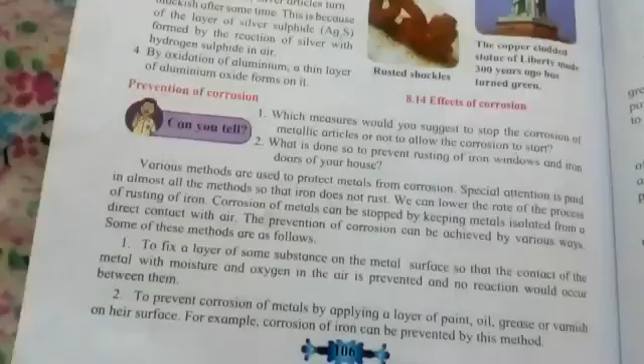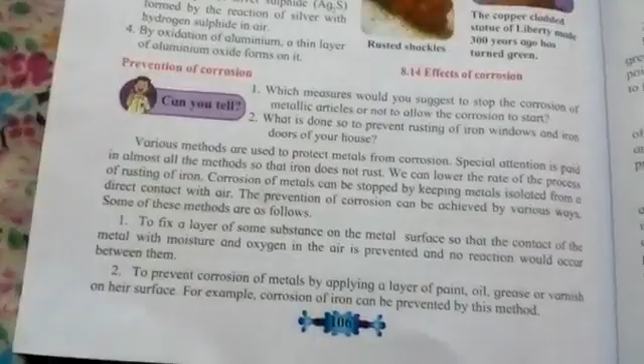Prevention of corrosion means to prevent the metal from getting degraded, or to stop the formation of oxide layer or carbonate layer on the metal. So we'll see all these things.

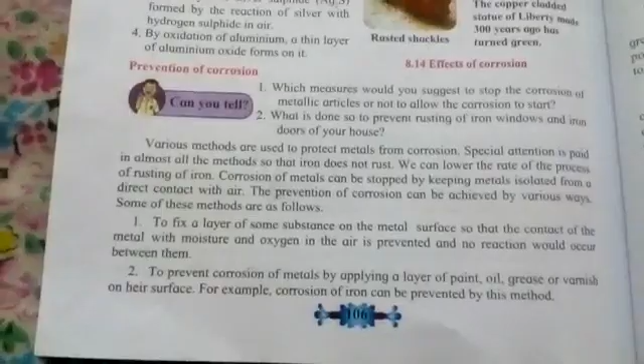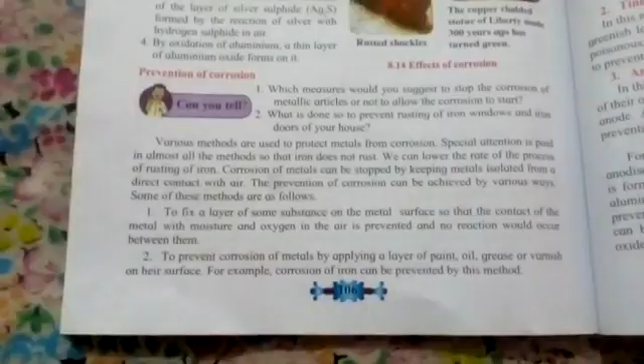First we'll see about iron, that iron can be protected against corrosion because iron gets rusted, and rusting is a part of corrosion, because it is like the chemical attack on the surface of iron which results in the formation of rust. If we are taking proper precautions, we can protect iron from getting rusted.

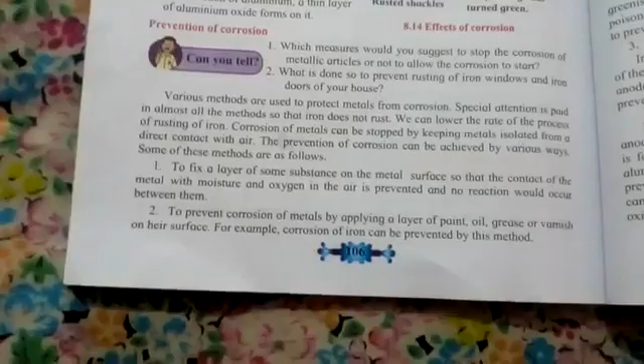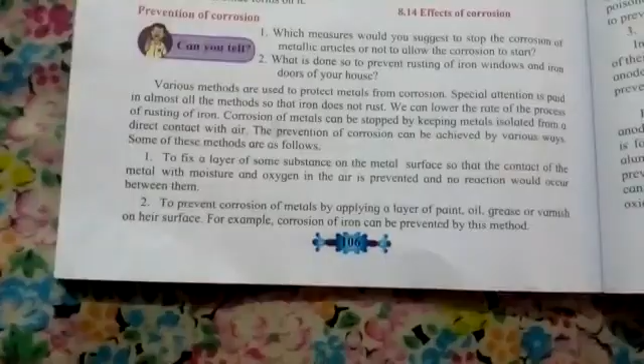Metals can be isolated from coming into direct contact with air so that corrosion will not take place. Or we can adopt certain other methods to prevent corrosion. The first one is to fix a layer of substance on the metal surface so that contact of the metal with moisture and oxygen in the air is prevented and no reaction would occur.

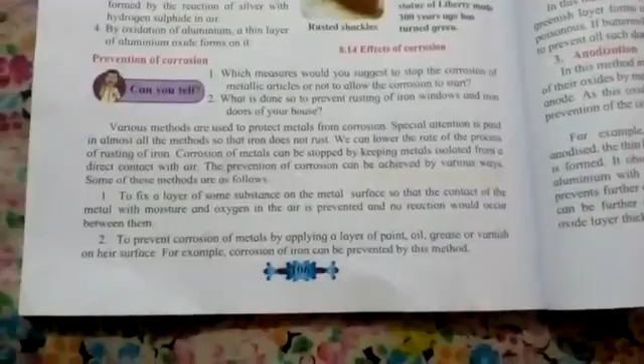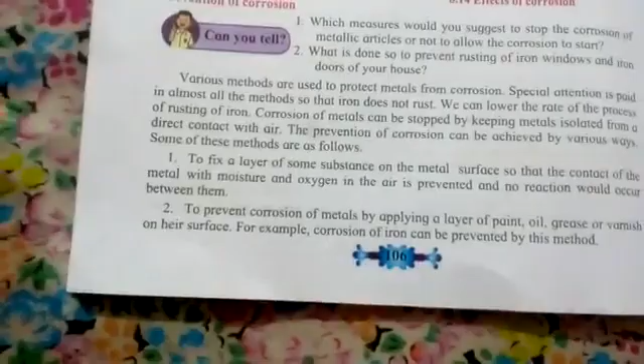If metal is coming in direct contact with environmental agents like air and water, corrosion will take place. If we are taking iron, iron will get rusted. So you have to apply some coating over the surface of iron.

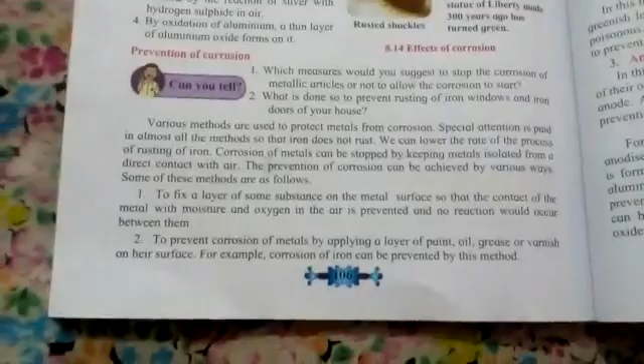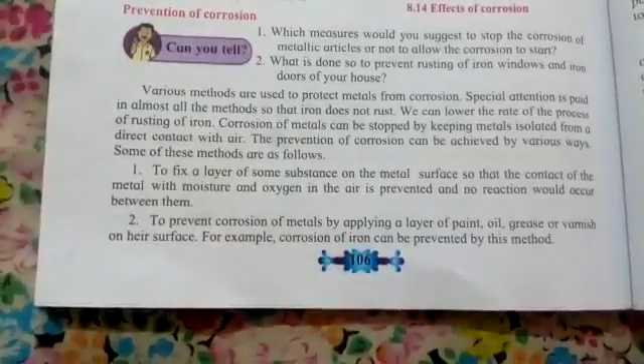For example, if you are painting that surface with oil paint, with grease, or if you are varnishing, you can protect that iron surface from getting corroded. So these are certain methods which, if we adopt, we can protect iron from getting rusted.

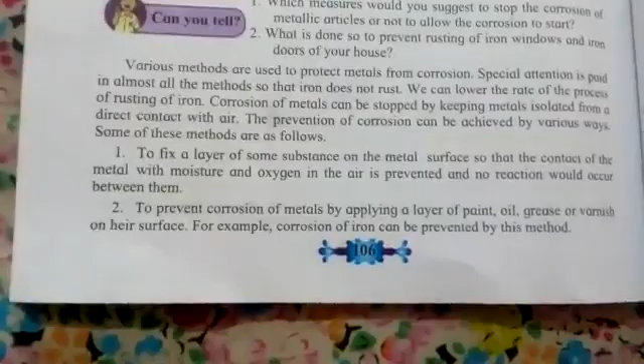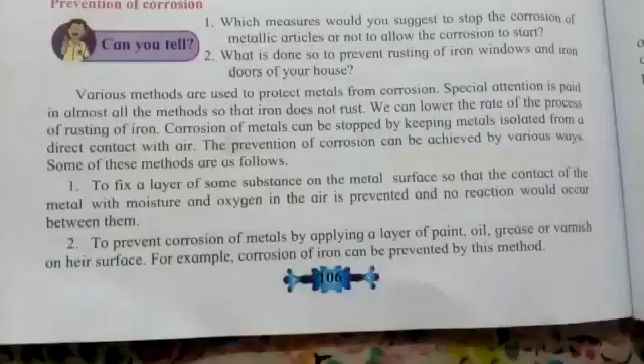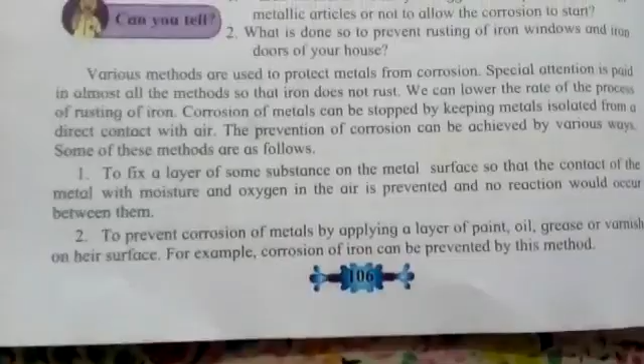These methods are known as barrier methods, because you put some barrier, some obstruction, so that the metal will not come in direct contact with environmental agents like air and water. So what will come into contact is the layer of paint, the layer of oil, the layer of grease, and the metal will be hidden. For example, if you are taking iron, iron will be hidden by this layer of paint, oil, or grease. So these methods can be known as barrier methods, and this is how we can protect iron from getting rusted or corroded.

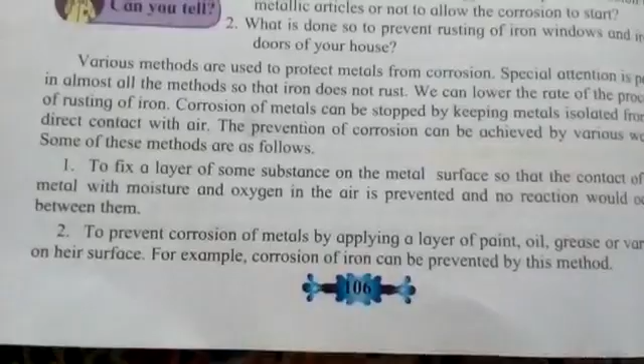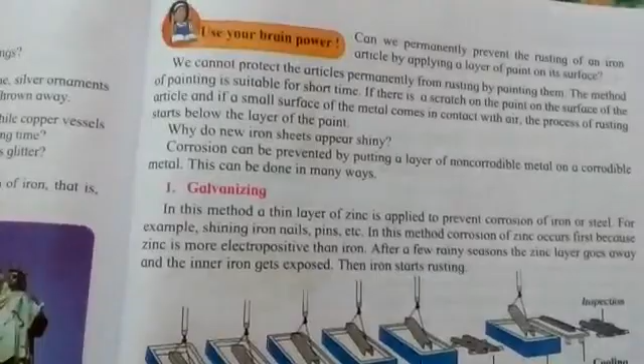We cannot protect the articles permanently from rusting by painting them, because if there is any scratch on the paint, the layer will be removed and the metal surface will get exposed to the air, and then it will get corroded or rusted.

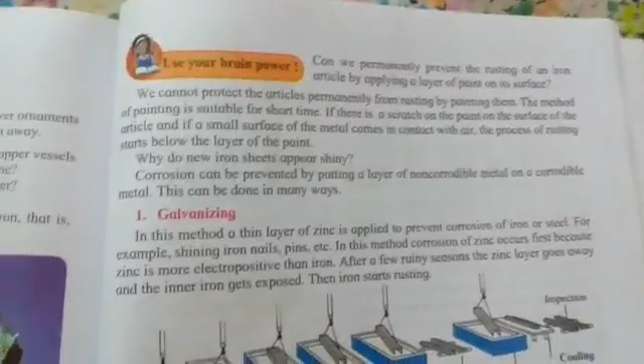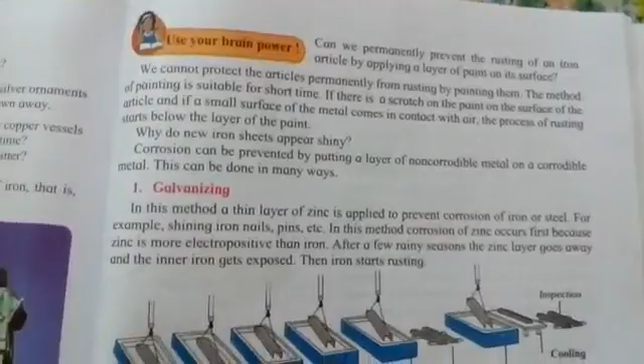So we can adopt certain other methods for protecting iron, and that is given here: corrosion can be prevented by putting a layer of non-corrodible metal on a corrodible metal. This can be done in many ways, meaning we coat certain other metal on the surface of iron, and this is how we can protect iron from getting rusted.

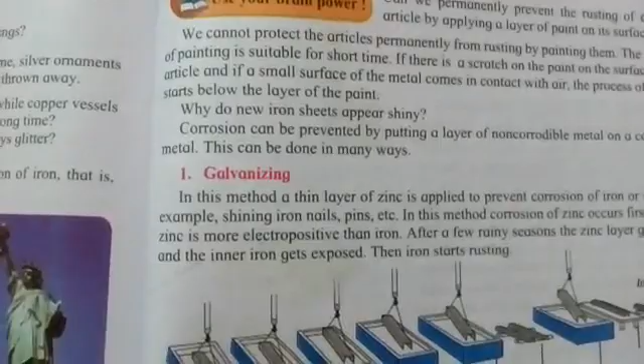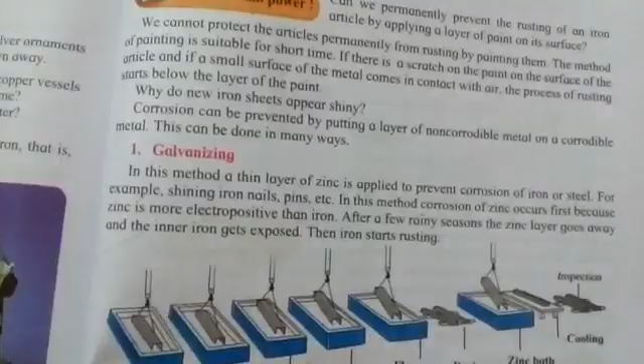The first method is galvanizing or galvanization. In this method, a thin layer of zinc is applied to prevent corrosion of iron or steel. So we can make a coating of zinc on the surface of iron or steel, because zinc is more electropositive than iron, and zinc is more reactive than iron.

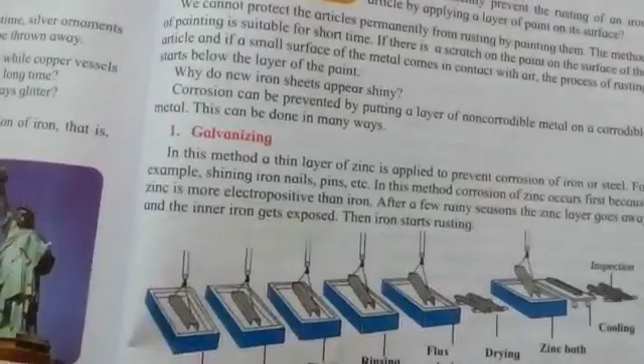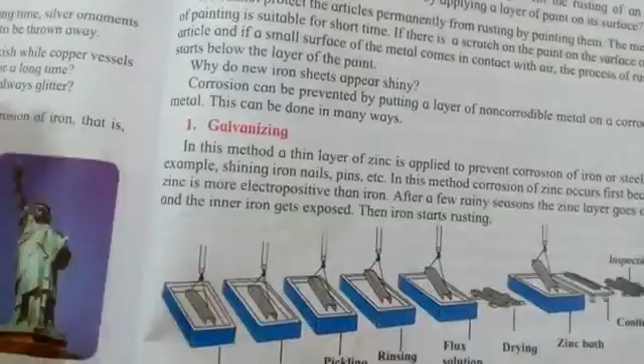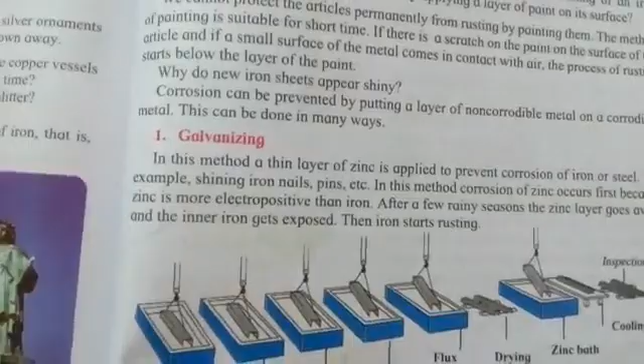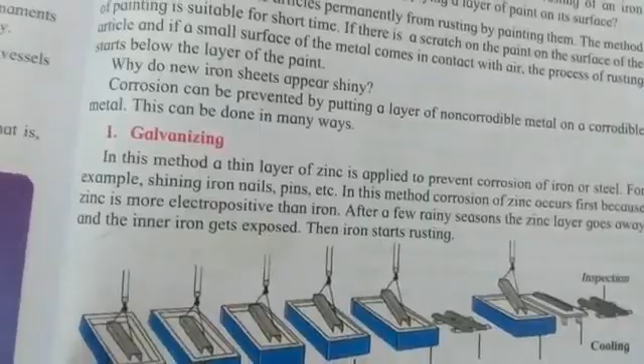So zinc will face the environmental agents like air and water and will form zinc oxide, and iron will be protected because over the surface of iron there is a layer of zinc, and since zinc is more electropositive, it will sacrifice itself. Such a method is known as the sacrificial method, and that zinc layer will not allow air and water to come in direct contact with the iron. This is how iron can be protected from getting rusted or corroded. This is known as galvanization.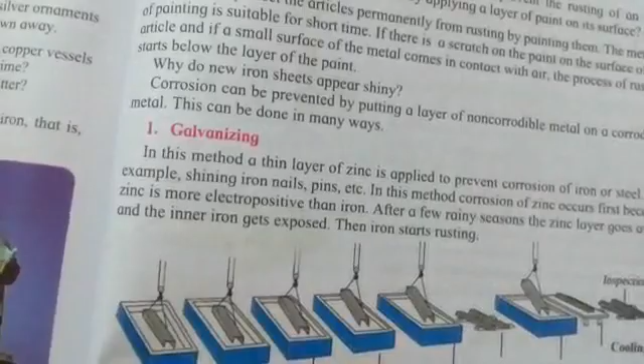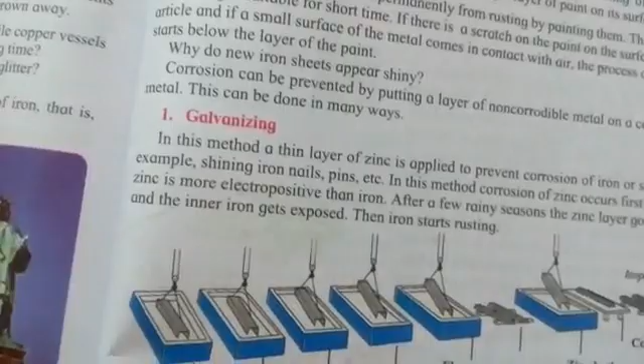Now, there are some steel cans used to store food, but for those we cannot do zinc coating because it may be poisonous. That is why tin coating is done on the steel can from the inner side so that it will be protected against rusting.

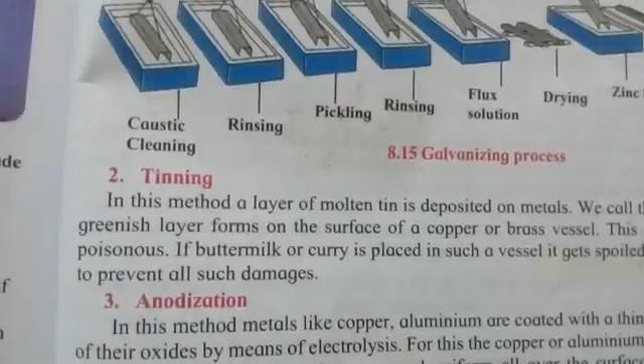Now the next method is tinning itself. In this method, a layer of molten tin is deposited on the metals. We call this kalhai. You might have heard about this term kalhai, where a layer of molten tin is deposited on the vessel so that the vessel will be protected against rusting or corrosion.

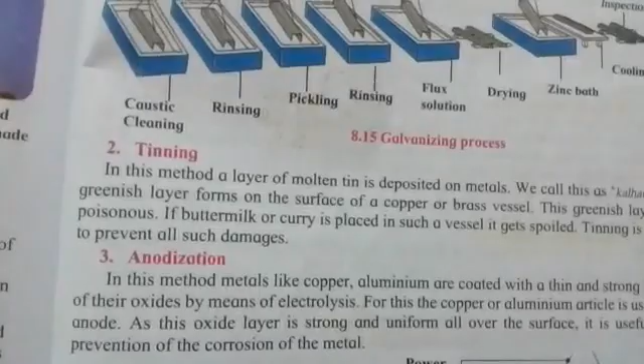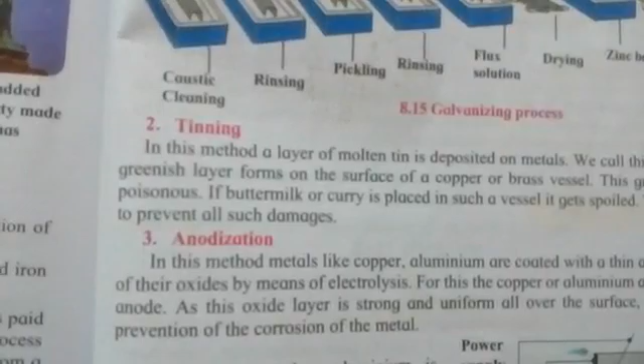But a greenish layer forms on the surface of copper or brass vessels. This greenish layer is poisonous. I have taught you how copper can be corroded by carbon dioxide, resulting in the formation of copper carbonate. That greenish layer can spoil buttermilk, milk, or curry if you keep it in that vessel. That is why we should avoid keeping such foodstuffs in copper vessels.

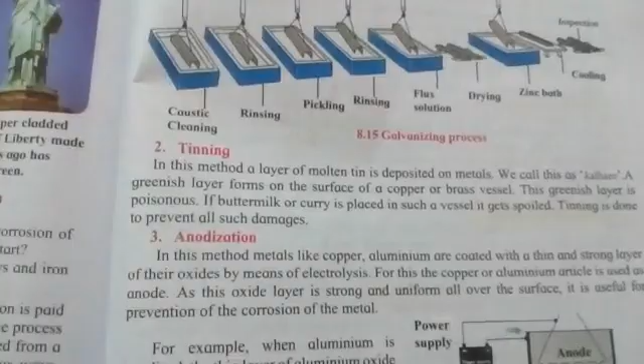So to avoid all these things, tinning can be done on the surface of copper or brass also, so that the copper vessels or brass vessels can be protected from getting corroded, and we can prevent further damage.